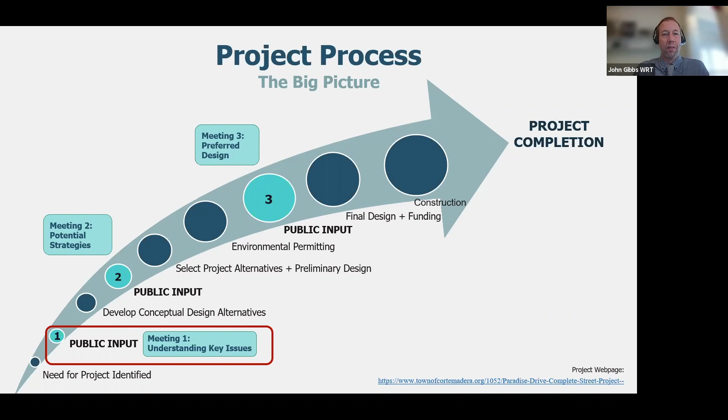All right, so I hope that's helpful for framing kind of where we are tonight and where this is going. Starting to talk now and zoom in a little bit more to the roadway.

This is kind of the full extent of the corridor, and just understanding Paradise Drive, not just as a local street, but really as a regionally serving corridor. It's not only an important arterial within the town, it's providing access to a number of important places, both within the project corridor as well as beyond.

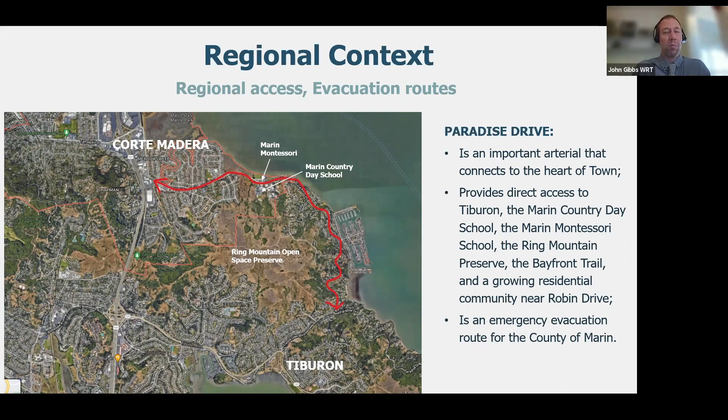It's also an important emergency evacuation route that's recognized by the county as it connects all the way over to Tiburon. In the event of flooding, fire, landslides, or other things that might block a roadway, it's a really important regional connection. And that's an important thing to note as part of this process.

Zooming in, we just wanted to highlight a few of the key things going on in this corridor that we're aware of, and hopefully this is good background for you all. So obviously there's important schools, important access to those schools, but also to some residences that are at some of those same intersections, and residences beyond and all along the Paradise Drive corridor.

There's a really important pedestrian crossing that happens both through a bridge overhead, but there's also some planned improvements for at-grade crosswalks between the schools and at Upland. We're aware that there's parking shared back and forth across the roadway, with students and teachers. There's a lot going on right in that intersection. We have our work cut out for us for sure.

But there's also kind of a natural side to this corridor as well. The Ring Mountain Preserve is just adjacent to the south. There's a really important trail access point there, and some on-street parking where people can stage and take off for cycling or hiking up on that hill. Audubon owns property, and there's some access to the marsh, and really important views.

I'm sure that folks who live out along Paradise Drive and at points beyond love the vast vistas out into the marsh as they go through here. And we would expect to, and we'd like to hear a little bit more about if that's something that resonates with you all.

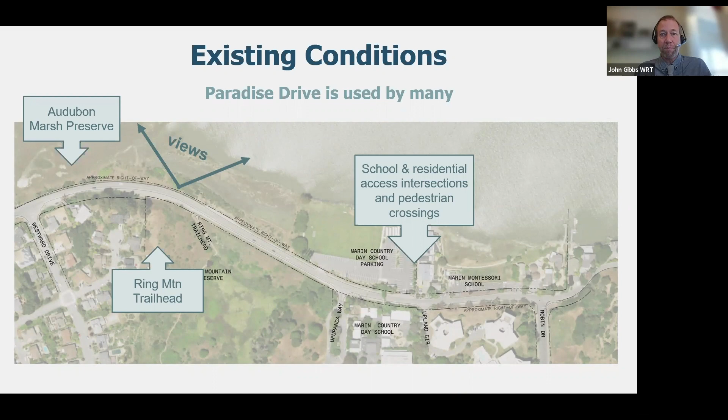So now zooming in, what we're going to do is just talk through some of the key issues that we've been aware of. And for many of the cyclists on the call, it's a 2-lane roadway.

It has a narrow shoulder, but currently there are no bicycle facilities striped out on this. It's planned as part of the regional and Bay Area wide Bay Trail. It's envisioned to have a facility of a Class 1 path somewhere along this corridor. That's certainly been talked about. And there's certainly a need for regional cyclists getting home, for commuting, recreationally, and getting kids to school.

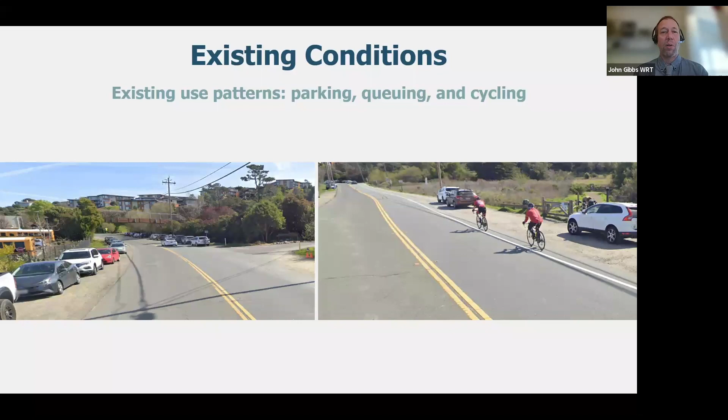There's a lot of folks parking along the shoulders. In this photo, you can see some of the parking associated with the trailhead going up to Ring Mountain. There's also some parking that comes from the schools, and we're aware of maybe about a dozen parking spaces that are often used for folks associated with the school. If there's some other parking needs, we'd love to hear more about that today.

There's another function many of us are familiar with, related to queuing along the street. At pickup and drop off, largely associated with Marin Country Day, there are a lot of cars staging along the shoulder of the roadway and then making their right-hand turn into Upupanda Way.

Upupanda Way. That street always gets me. I think that's one of the more clever street names I've heard.

There's quite a bit of queuing there, so that's something we want to talk about tonight. How do we accommodate that? What are some of the impacts and uncomfortable conflicts occurring with that? We'd like to come back with ideas about how to work with the schools to provide safe and convenient access to families, but there are other things that need to happen along this roadway too. Some important balancing needs to be done.

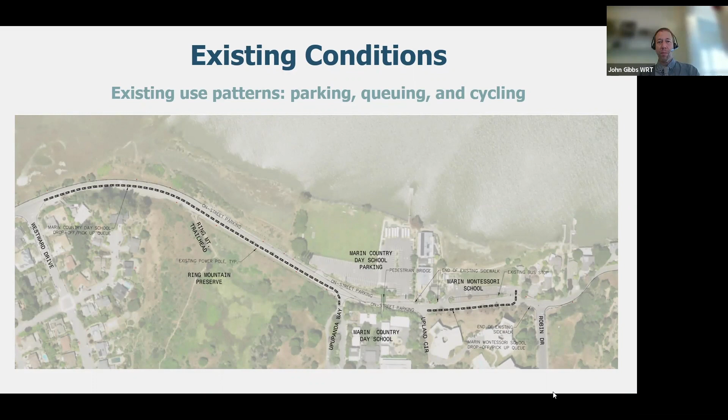We have some photos on the next slide that start to show some of that condition, including an aerial photo. A lot of this queuing occurs during a specific time of day, largely at pickup, and mostly occupies the unpaved dirt shoulder on the south side of the street.

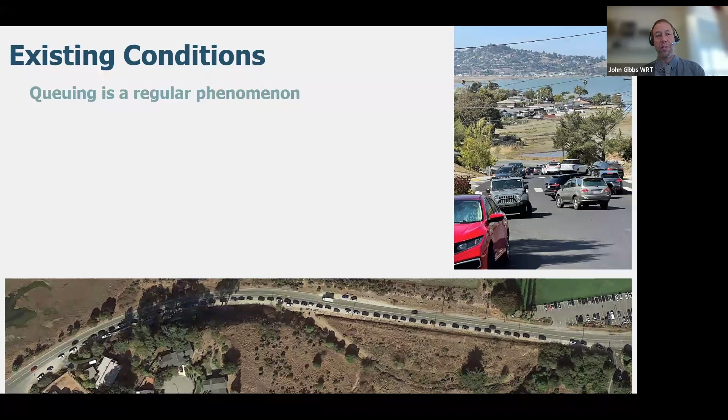This is certainly an inconvenience for now, but looking to the future, we're also aware of rising seas due to climate change. At some point we'll have exacerbated rainstorm events and flooding that we need to address today, but also looking to the future, there's certainly a conversation to be had there as well.

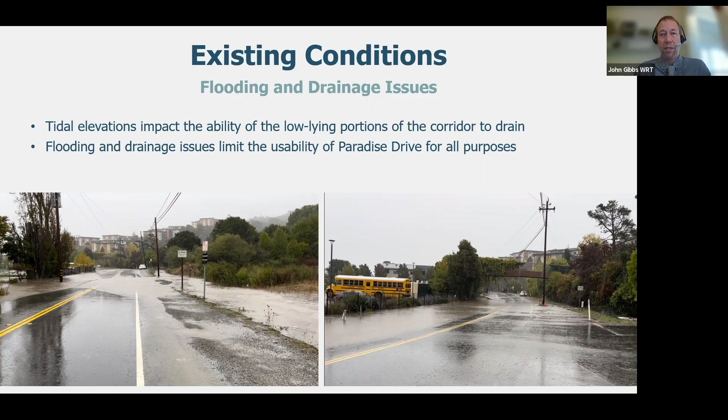This brings us to the point where we have a number of things to think about related to cyclists, parking, and queuing, but we only have so much space. We have an existing right-of-way and don't own the property outside of that, so we have to work within our means. There are also a lot of utilities along this corridor, which we have a real limited ability to expand around.

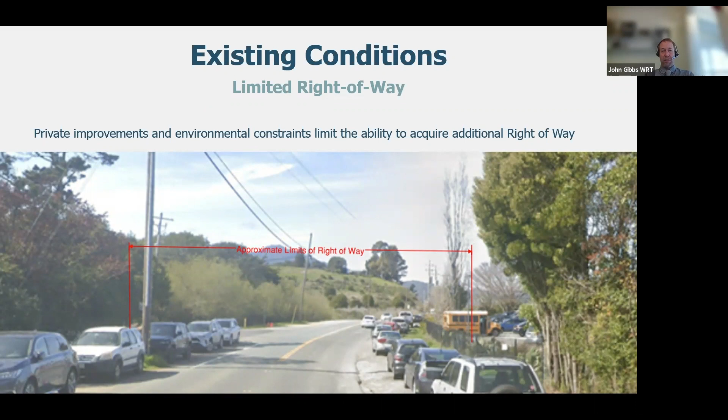These are some of the utility poles—we have instances of utility poles on both sides of the street. You can't really imagine getting a bike lane through utility poles or a widened shoulder, though parking certainly works between poles. We don't have the opportunity to do undergrounding.

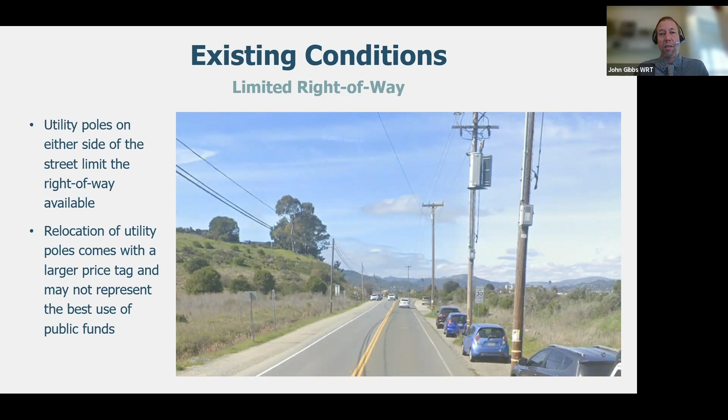There may be a little flexibility because some of these services are communications, so we might be able to consider some consolidation. But right now undergrounding starts to be a pretty big expense, and that's probably not going to be a feasible approach due to the incredible costs associated with that process.

Other things going on along this corridor that constrain our right-of-way have to do with existing habitat areas and wetlands that have been delineated and identified, and the vegetation supporting those means we can't widen this road and pave over those environmental features. That's just not going to be a feasible direction.

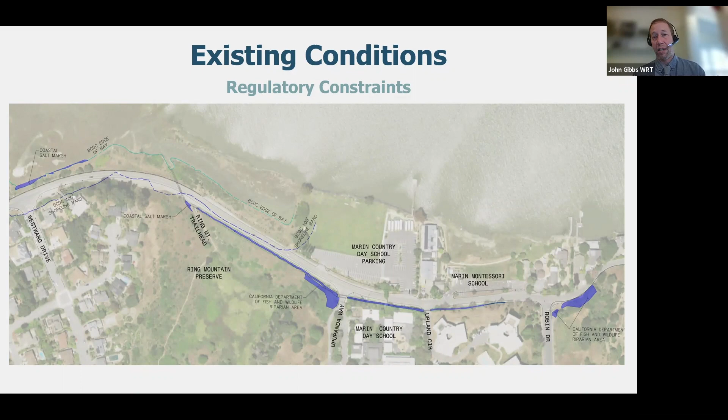The town has made it really clear that those are important natural resources along this marsh, associated with Ring Mountain and the salt marsh, and those seasonal wetland areas are incredibly important resources. So there's not a lot of interest or ability, frankly, to make changes to those.

The California Department of Fish and Wildlife is another important regulatory agency, also really interested in preserving and protecting these open space and natural resource features. So again, just working within our right-of-way and getting really creative is going to be an important action, and the team is kind of gearing up for a process to get really creative, and we're excited about your thoughts and your ideas tonight.

Within that right-of-way that we have available, we put together just a very simple kind of cartoony description that describes, okay, 2 travel lanes, 11 feet in each direction. There are these kind of uneven shoulders, sometimes interrupted by power poles and communication poles, sometimes not. And then there's the more natural landscape features that extend beyond this right-of-way. Our average width varies a little throughout the corridor, but generally a little over 40 feet. So we have our work cut out for us to figure out what to do with that.

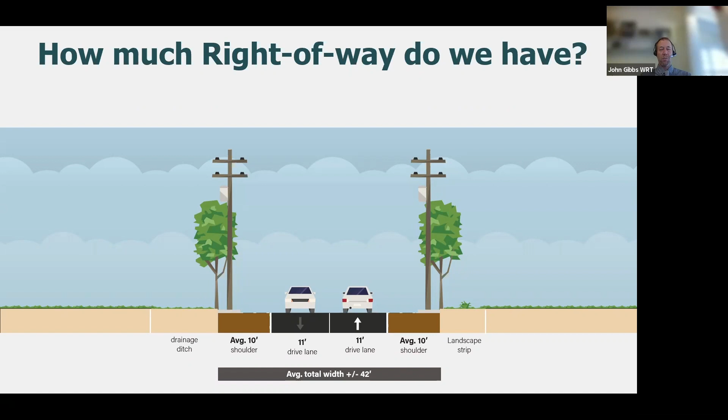Considerations that we are kind of already expecting to come up in the conversation tonight, and kind of want to cue you guys up in a way.

Consideration of bicycle facilities, whether it's a Class 1 multi-use path—a 2-directional path located on one side of the road—or Class 2 bike lanes, traditionally on the shoulders of the lane, sharrows, pedestrian paths, or sidewalks. The pedestrian beacon would be really at the crosswalk there between the schools. Travel lanes are kind of an obvious one—cars are still going to be able to pass on the street—and then some space for queuing.

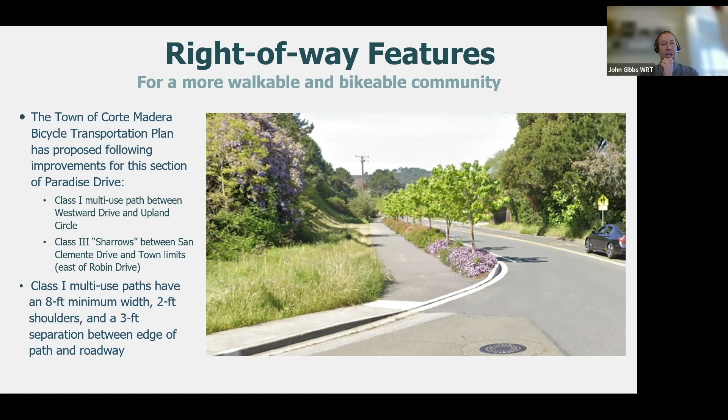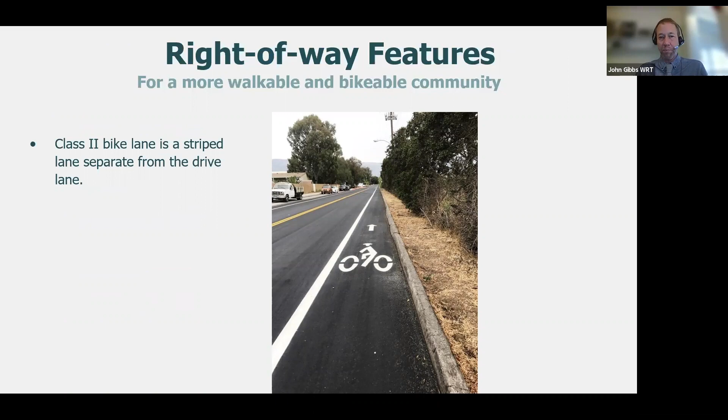We have a couple of supplemental pictures so we're all aware of what we mean by these facilities. This is an image showing a typical Class 1 path. This image shows a Class 2 bike lane, in this instance without a buffer—there are some other instances around the county with a buffer, typically about 6 feet wide. A Class 3 is more of a shared lane, just making sure the lane is wide enough and that there's a marking to alert drivers that bikes are also using the road and they should share it. This is also similar to basically a Class 3, so this could also be considered. And there's a sidewalk as an example, but I think we all know what a sidewalk looks like.

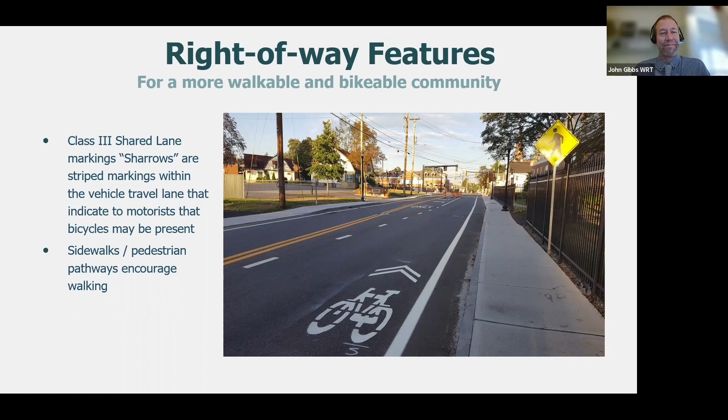All right, so with that, we've kind of walked through a little overview, and that's going to start to wrap up our presentation and some of our initial understanding of this corridor. We wanted to launch a little poll here again and get you guys thinking and give us a little more feedback, and then we're going to move into a conversation.

Again, no wrong answers, and we can continue this verbally in a few minutes. So looking at some of the critical issues, what do you guys think is most critical to be addressed? What's the big issue out here? What's really your top concern? Is it about traffic, the queuing and access to school? Is it the lack of bicycle facilities? Is it the seasonal flooding, or is it something else?

And you'll be able to verbally tell us the other if that's your answer.

How are we doing? We have 77% participation. Come on, we want, just like when we fundraise for our schools, 100% participation. Okay, I'm going to end the poll now. There are 2 people signed in twice, so I think we got 100%, even though it says 88.

Awesome, and so glad those are the results—good diversity of feedback here. The traffic and some of the queuing, access to schools, that was important, but very much tied with the bicycle access. And I'm really interested in the other, and glad we'll be able to hear some of those comments and questions coming up. Thanks, everybody. I think we're going to do one more, which is a little bit more about the issues and some of the next steps.

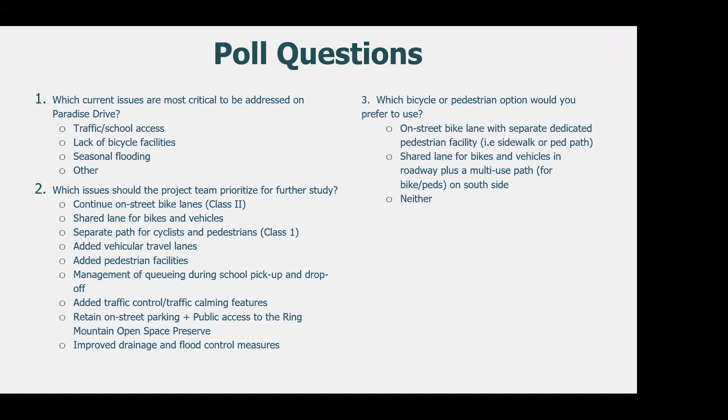Great, so definitely some preference for a separated multi-use path for cyclists and pedestrians, recognizing that there would be some shared lanes for vehicles and perhaps more faster moving, experienced cyclists. That has a little bit more priority, but there's a large contingent that didn't feel great about either of those options. So that'll be great because we'll be able to talk a little more about that and hear those comments coming up.

As you can imagine, within the limited right of way, we've got to make some trade-offs and be pretty creative. So you can kind of tell what we're working towards here.

So lastly, before we open this up, I wanted to come back because now you're all wondering, okay, what are you guys doing tonight and what's next? So tonight is the presentation we just gave, understanding the key issues, and we're going to talk a lot more about that in just a couple minutes. Our next meeting, we'll be coming back with some potential strategies - a series of alternatives that look at it different ways. We'll get a lot of good input and be able to evaluate to identify the best way to move forward. Then the team will continue working and come back with a preferred scheme down the road.